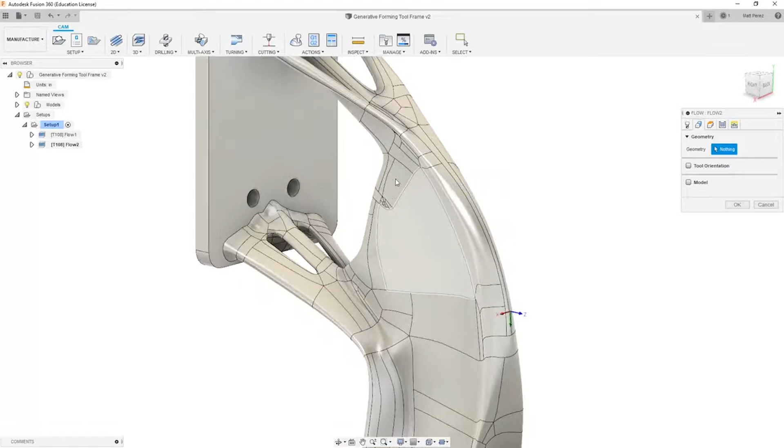Let's carry on with the file from our previous example, and now we want to take a look at using our multi-axis flow in a multi-axis operation. So we're going to get started by going to multi-axis flow. We're going to be using the same tool, but in our geometry selection, we want to take a look at an area on the side of our part. So for this purpose, I'm going to just simply select this face, which is obscured by this rib on our part. Notice the orientation of the UV curves.

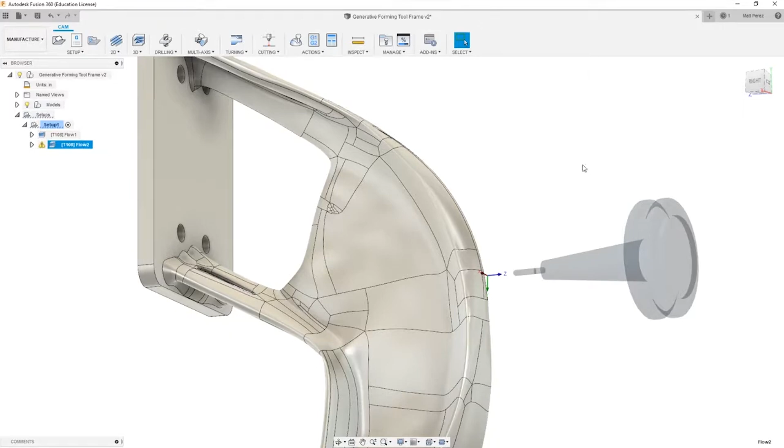We're going to go into our passes section and we're going to increase this to 25 and allow it to cut in both directions. If I say OK to this operation, it's going to try to calculate it based on our 3 axis parameters. Now in this case, if we were to look at the direction the tool is coming from, it can't see the selection at all, which means it can't create that toolpath.

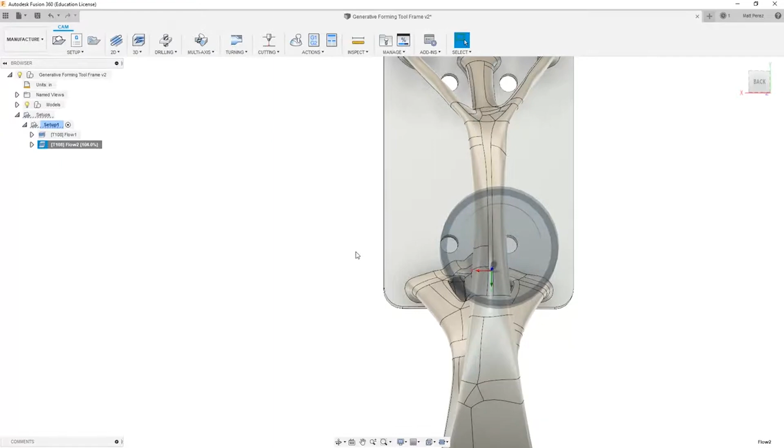But if we go back in and we edit the parameters in our passes section, if we use multi-axis, then we simply say OK. We'll allow it to regenerate this toolpath with the ability to tilt the tool in 5 axes. So now that it can tilt the tool, notice that it's creating the toolpath on the selected face.

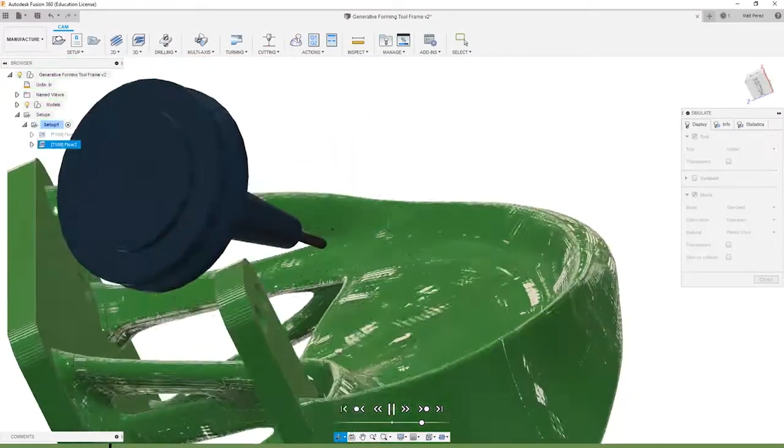Let's go ahead and simulate this toolpath and take a look at what the cut looks like. Again, our stock is based on the solid body, so we're not going to see any stock removal. But what we do want to look at is the direction that the tool is moving back and forth, and making sure that it is actually changing its orientation based on the selected face. So as it moves back and forth, you can see that the tool is staying normal to the surface that we selected.

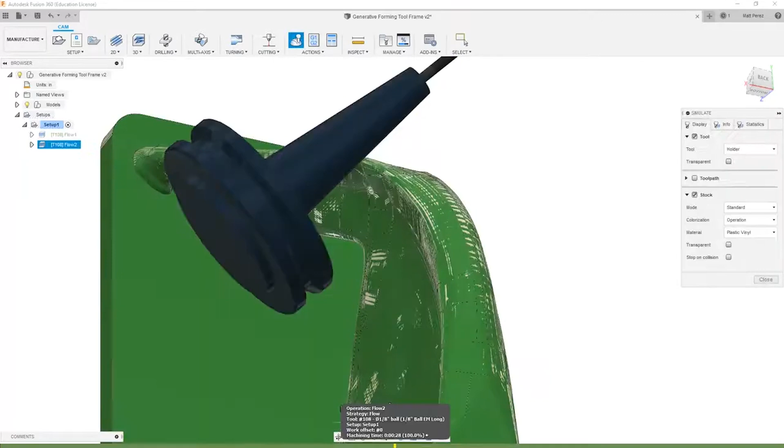If we modify those toolpath parameters, we can change the UV direction. We can say along V, which will recalculate it in a vertical orientation as we're looking at it. This time if we simulate it, we'll see that the tool is moving up and down rather than moving side to side.

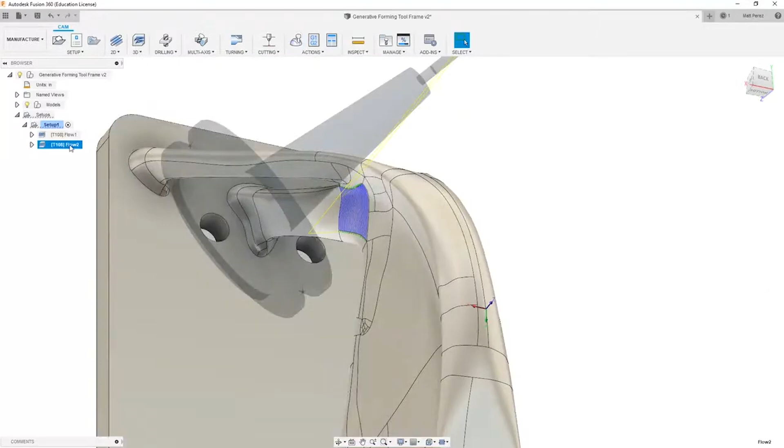Depending on the selected geometry and potentially some of the surrounding geometry, you might have to decide whether or not to make a U or a V style direction cut. In some cases, it really won't have any effect. It will of course change the direction of the cut, but in some cases one way might be better than the other.

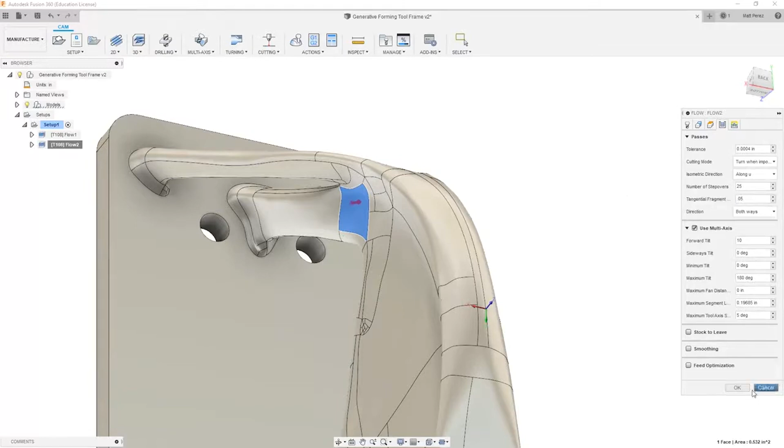In our passes section with multi-axis turned on, we can also adjust some of the parameters that we've seen before, such as forward or sideways tilt. We can adjust the minimum and maximum tilt, as well as the fan distance, the segment length, as well as the axis sweep. In this case, I'm going to adjust the forward tilt to be 10 degrees. I'm going to change the isometric direction to along U, and I'm going to change the tangential fragment distance to be 0.05. We'll select OK, allow it to recalculate, and then we'll simulate this toolpath.

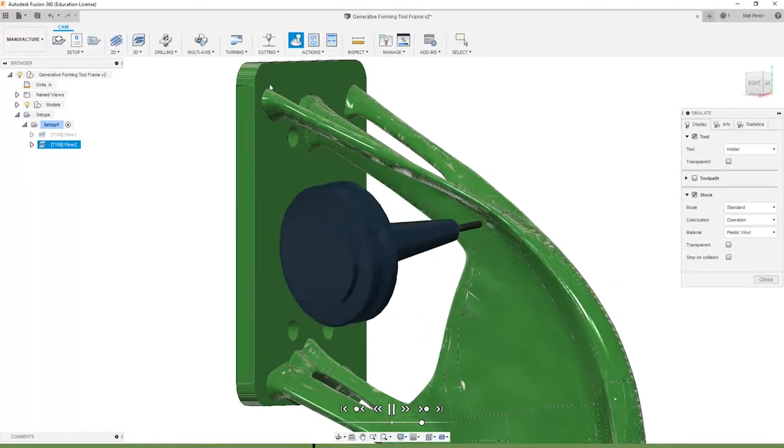So let's go ahead and play through this toolpath and take a look at the orientation of the tool. So notice now the tool has a slight angle where it's leaning toward the mounting plate for this part. We can also see that the tool is actually contacting the surface and removing a small amount of material.

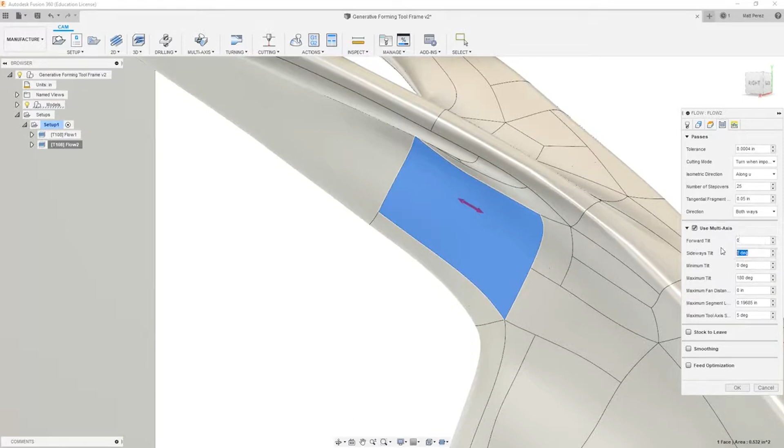Let's go ahead and head back into those parameters. And let's change the forward tilt back to 0. And let's adjust the sideways tilt to 10 degrees. Keep in mind that forward and sideways are going to be relative to the U or V directions.

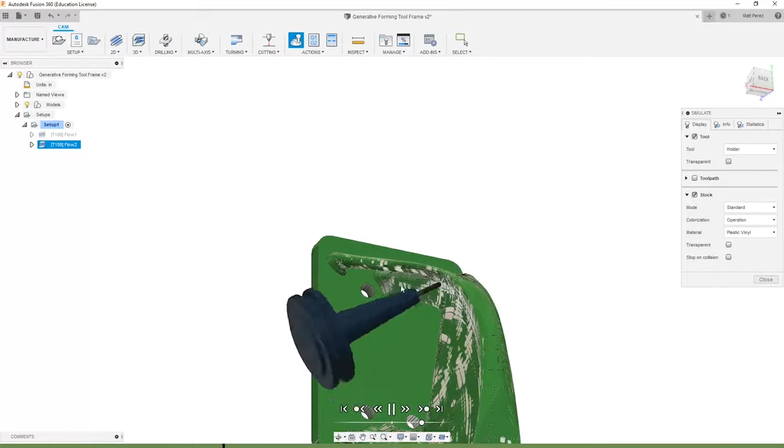Now let's go ahead and simulate this toolpath and see how that affected the tool angle. Now you can see that the tool is angled down a little bit more than it was before, but in terms of this orientation in the Z-axis as we're looking at it, it's keeping it normal to the selected surface.

So again, these options can come in handy, whether or not you're trying to drive the direction the tool is dragging across the surface, or if you're trying to avoid some surrounding geometry. I'm going to reset my sideways tilt back to 0 degrees. I'm going to leave my minimum and maximum tilt values, and I'm going to turn on my smoothing.

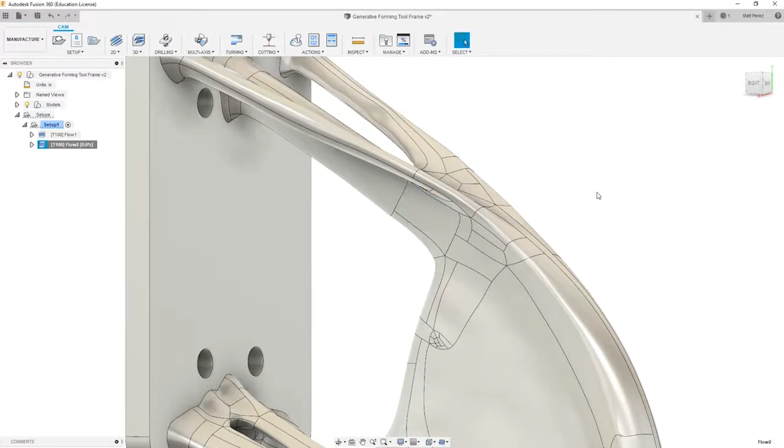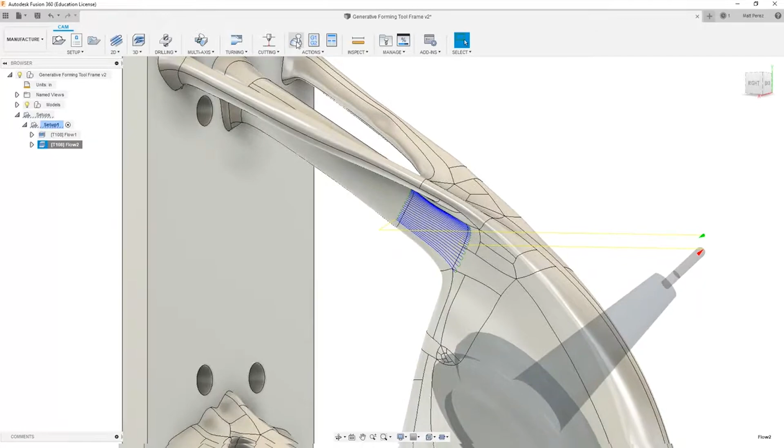The smoothing tolerance will change the properties of the actual curves that the toolpath is following. By changing the smoothing tolerance, or even just turning that option on, you might get a better final result of your machined part. While we can't see the difference on the screen, we will see the difference when we finally machine our part.

Let's go ahead and take a look at this in simulation one more time, and we can show the toolpath, and notice that we can show the points of the toolpath as well as the axes. We can also show all toolpaths, and if we zoom in, notice the number of points that we see on the screen, and you can see the points as the toolpath is turning and changing directions.

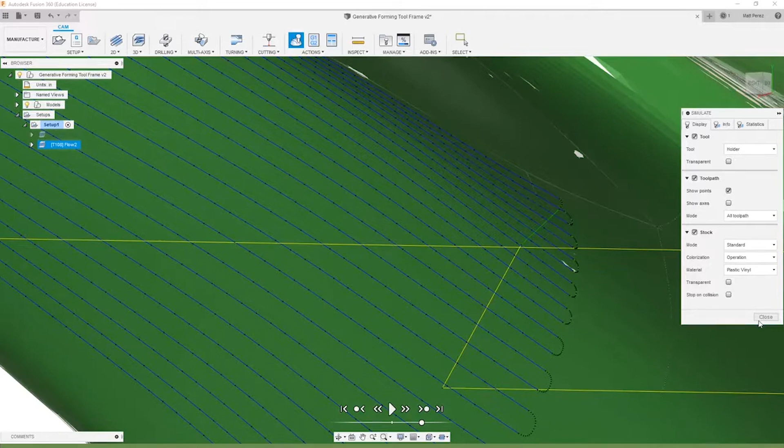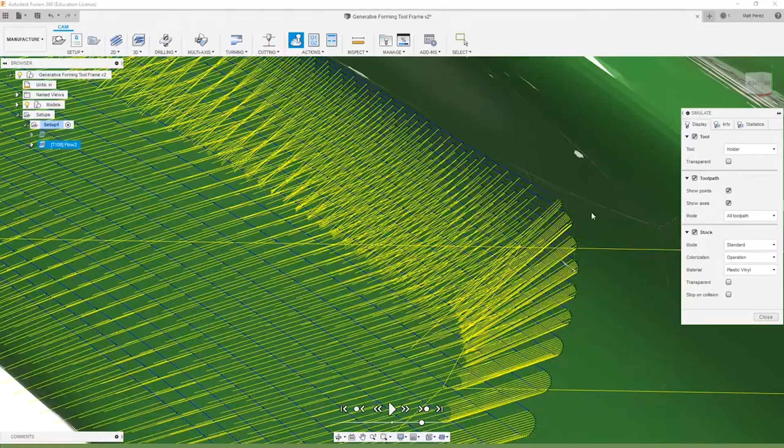If we go back into our parameters, and we go back into our smoothing tolerance value, and let's change this to a 0.0001, say OK, allow it to recalculate that, then go into simulation. You'll notice that when we show axes on the points, we can see the number of points displayed with the yellow rapid movements. Now these yellow lines aren't actually rapid movements where the tool is pulling up and away, but they're just an on-screen representation of where these points are in 3D space.

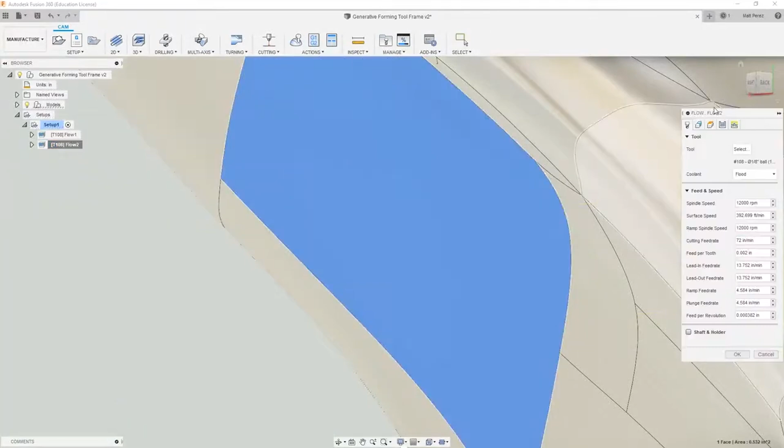If we go back into our toolpath, back into passes, we also have a tolerance value here. We can change the tolerance value, which every time we talk about tolerance or smoothing, it's going to be the fit of the curve to the actual geometry. When we talk about the fit of the curve, and we're dealing with parametric parts that have things like straight lines and fillets with constant radii, these are generally easier for us to visualize because we're dealing with either an arc or a straight line or even a complete arc, which is a circle.

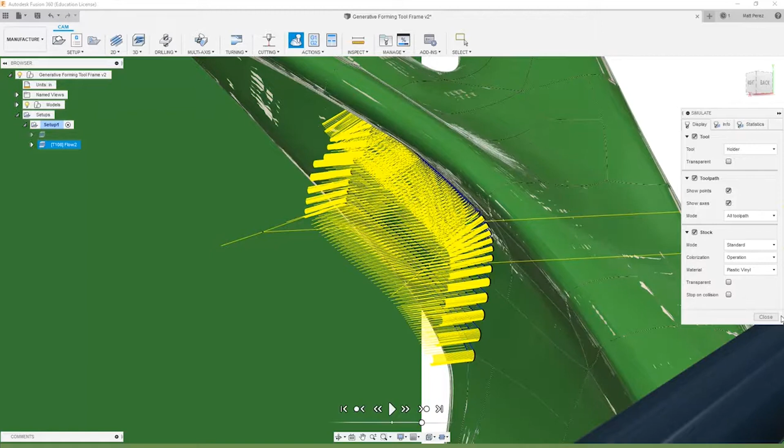But when we're dealing with these curves that are laid over these complex boundaries, these tolerance values might make the difference between getting a very highly faceted 3D cut part to getting something that's nice and smooth. We also have to think more about the size of the tool and the surrounding curvature when we're machining parts like this. Obviously, if we have tight areas that we need to machine, it's going to be easier to use a smaller tool to get into those areas. But when we're dealing with the big broad areas, we might actually want to do a different operation where we're using a larger diameter tool because it doesn't require such a fine radii.

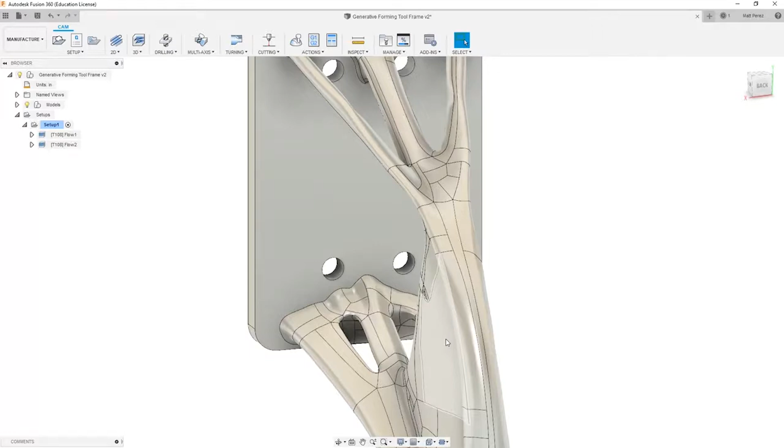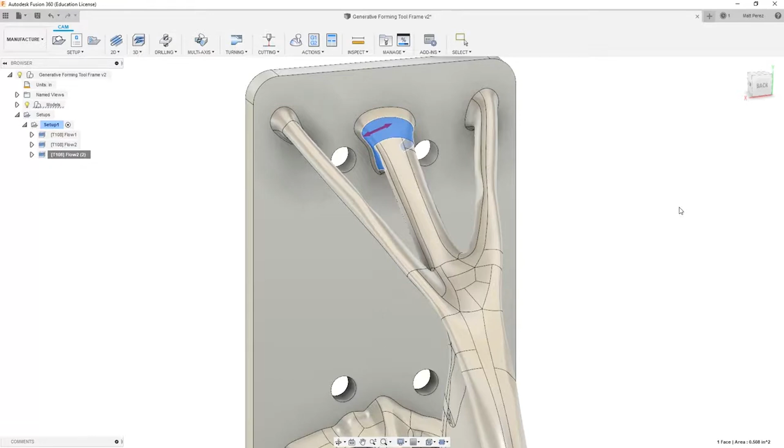Let's go ahead and duplicate our flow toolpath. And then we're going to right-click and edit and change our selection. This time I'm going to select this face here, and I'm going to say OK without changing any of our other parameters. This is a tricky one because it wraps around the part, and we're obstructed on one side by the mounting plate, and then on the left and right we have additional geometry that's going to cause problems for us. So let's try to have it calculate this geometry as a toolpath and see how it handles the collisions.

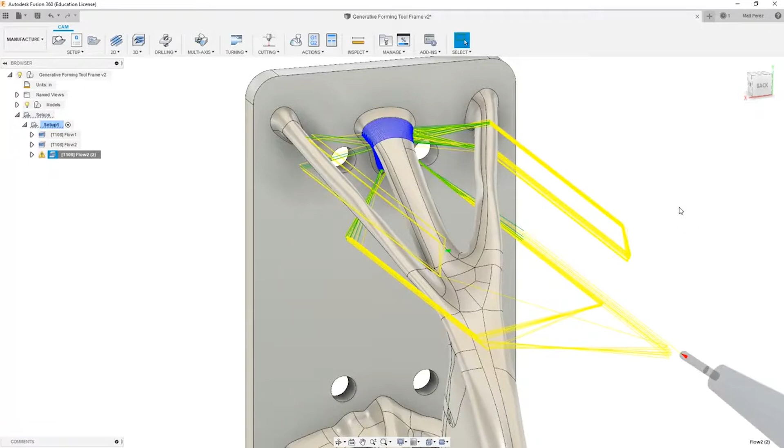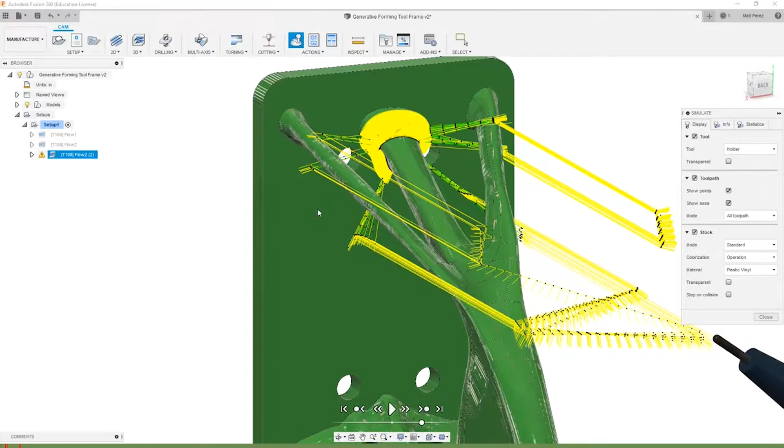Once it's calculated, let's take a look at the results. So you can see that we have a lot of rapid movements and some feed movements coming into the surface, and you'll also notice that we have a warning. The lead radius has been decreased to avoid linking gouging. Let's go ahead and simulate this and take a look at the results. I'm going to turn off the toolpath display and simply play through this to see where the tool moves to and how it's accessing this geometry.

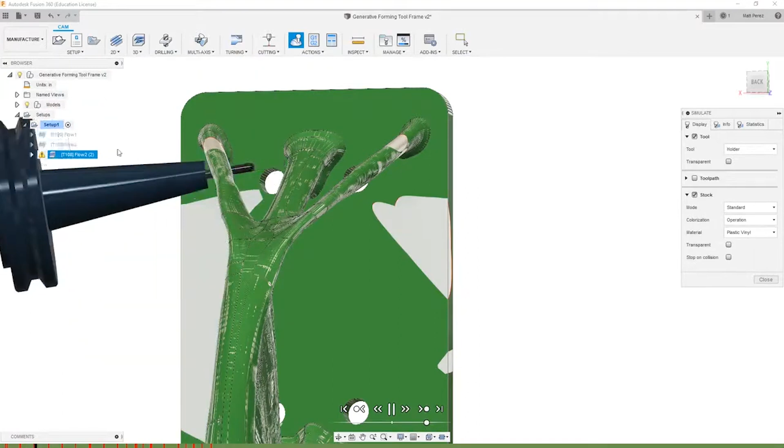So you'll instantly note that it hits the mounting plate. It hits these arms here. And if we turn off the original model and we're just looking at stock, you can see exactly the number of collisions and gouges that we're having with the holder and the tool itself.

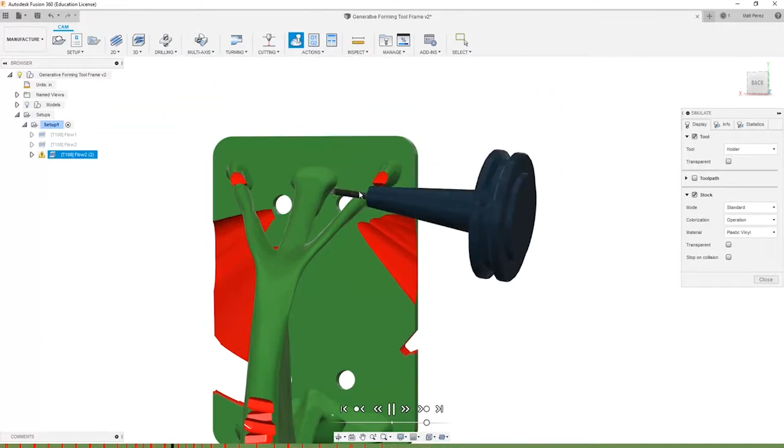So this is obviously not a great way to machine a part because we're taking more material, we're crashing into the part. So we really need to talk about ways in which we can handle collisions when we're talking about these multi-axis toolpaths. But before we make any more adjustments, let's go ahead and save the file before we move on to the next step.